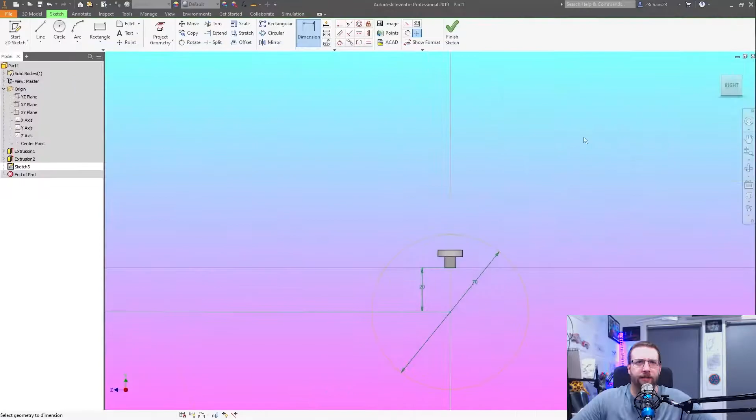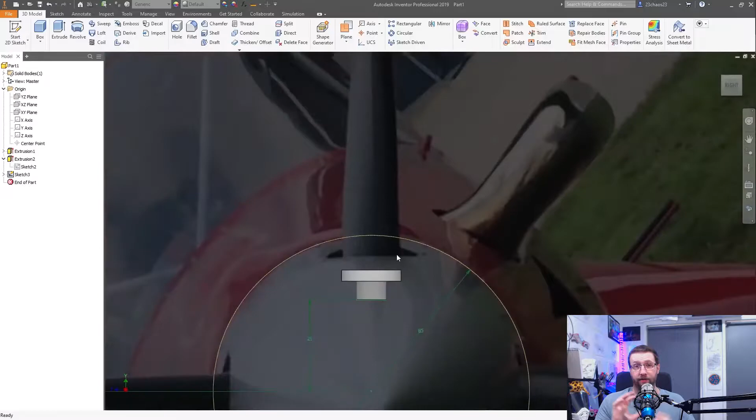First things first, get some reference, get it into the scene. Just get some scale, some points. In one of his videos during the build series for Draco, he mentioned that he's using a 104-inch prop, which is slightly larger than the 102-inch prop that comes standard with the Draco. So I know that I have the prop size, and I know how big I want to make the spinner hub, which is roughly 70, 80 millimeters-ish.

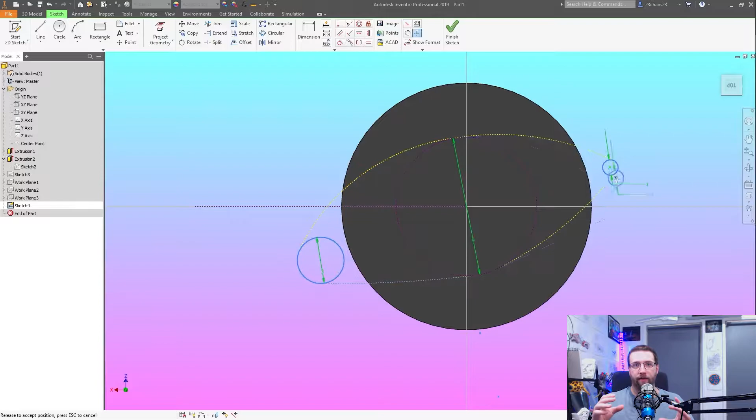It'll get better defined as we get further along in the project, when we can decide how the mechanisms and everything are going to work. But to start off with, just getting the reference in there, getting the length of the prop, and then looking at the prop from as many angles as I can to look at the shape and geometry of it. So here I'm just putting in the very first profile. It looks like a funny shape.

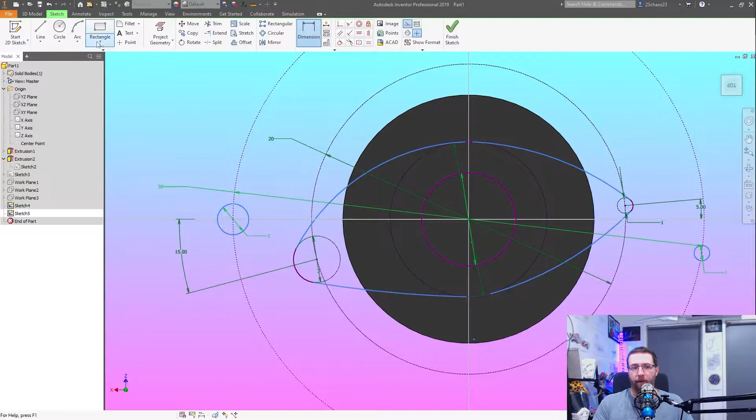Variable pitch props have slightly different aerofoils to regular props. Regular props are designed to have a certain pitch or a certain screw angle. This gives it a certain angle of attack when it is spinning around, and for every revolution, if we're moving through a perfect medium instead of air, for every bit that it cut through, it actually progressed that distance, based on its pitch, the spiral pattern that it creates. But a variable pitch prop needs to stay at a constant RPM to deliver different thrusts based on its angle of attack.

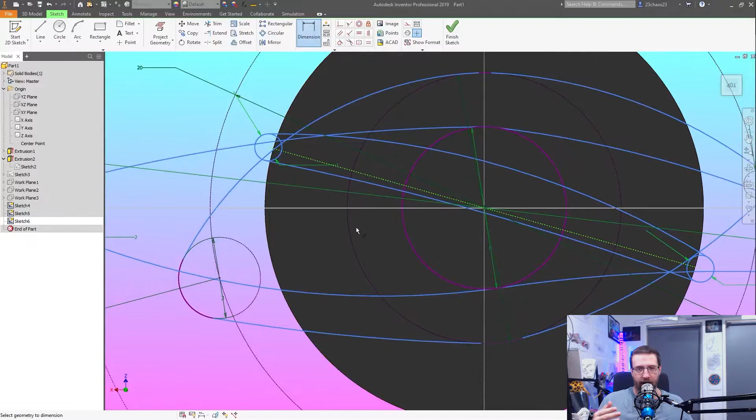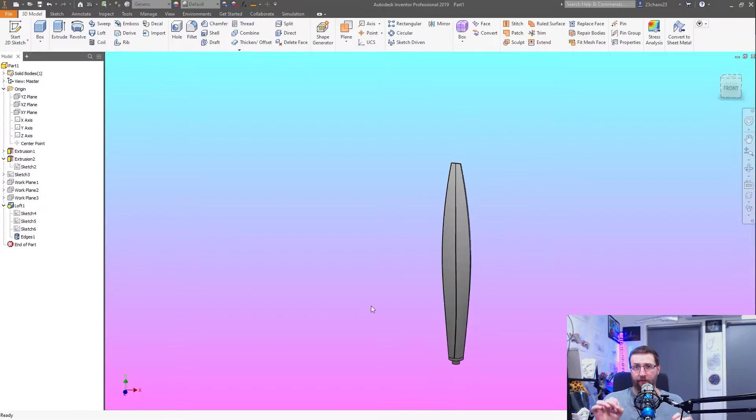So the shape of them is a little less aerofoily and a bit more flattish. It has a slight aerofoil curve to it, but for the most part it is just a flat blade that goes flappy when it's straight, when it's in beta mode, and it can turn and give you your reversed and forward thrust. So yeah, just going through creating basic profiles. This isn't the final form of it. You can see that center one is a bit weird. It's got a bit of an S shape to it.

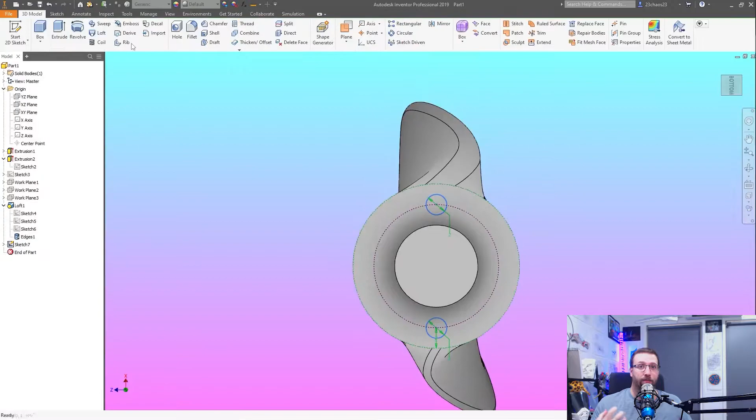I was just mocking this up quickly to get the basic shape as close as I can so that I could run some simulations. So after creating the shape, the right size, I'm looking here, okay, where can I put in cavities to put carbon fiber rods to give it some more strength? Because I'm pretty sure I'm gonna have to give it a little bit more strength, a bit more composite. But yeah, it might not need it. So there I got the weight of the blade. This was the key thing.

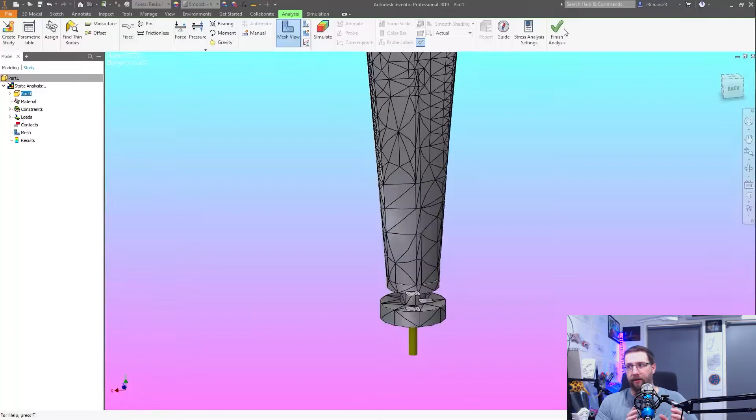So Inventor allows you to apply a materials property, and then you can look at the iProperties and it tells you the weight based on the volume and size of it. So that tells you how much it weighs. Then by going and doing a bit of Google searching, a couple of YouTube videos later, I find the mathematical formula for working out centrifugal force.

And from that, I can then make a spreadsheet, work out my RPMs, because I work out what RPM range I want. And from that, I now have how many newtons of force the blade will be under at a certain RPM. From that, I can transfer those newtons back into Inventor and run a sim test. And with the sim test, I can figure out if it's going to explode or not. Turns out it's not going to explode, and that's even without the carbon fiber reinforcing in it. So we're all good. So let's move on to the next thing, the tail section.

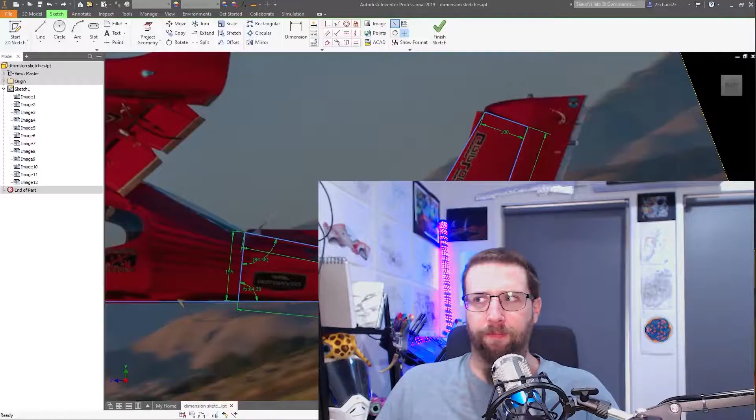This was interesting. This is one of the ones that I've done a couple of times now. This that I recorded is the first time I did it. Nothing really changed from the second iterations of this. The dimensions and the method I use for making the core structure, which is this cone shape, which is the tail itself, the spine. From this, I got dimensions of this. Okay, I've got a part file that I've got in the folder with all the parts for this.

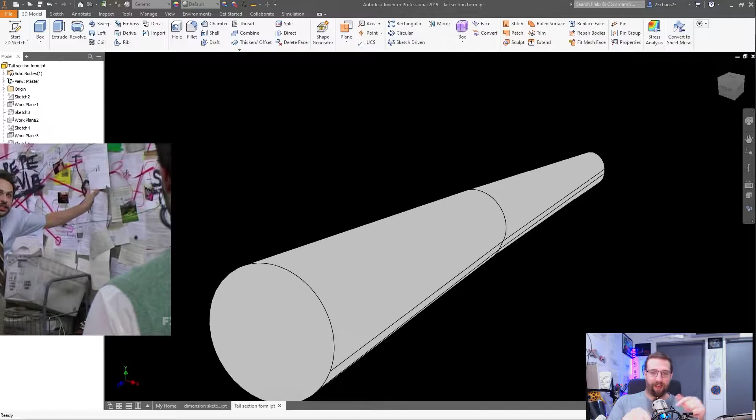And in this part file are just loads of pictures of the Draco stretched out to the right dimension for a certain individual thing and another thing that I can match the size of in another photo so that I can translate the dimensions from that image that I've stretched and scaled to the next one that I've stretched and scaled, so that I can get this one dimension on this one part that I can't get an accurate dimension of in the first photo because it's either not in the photo or the photo is at a certain angle that the perspective of it has changed and I can't get the dimension.

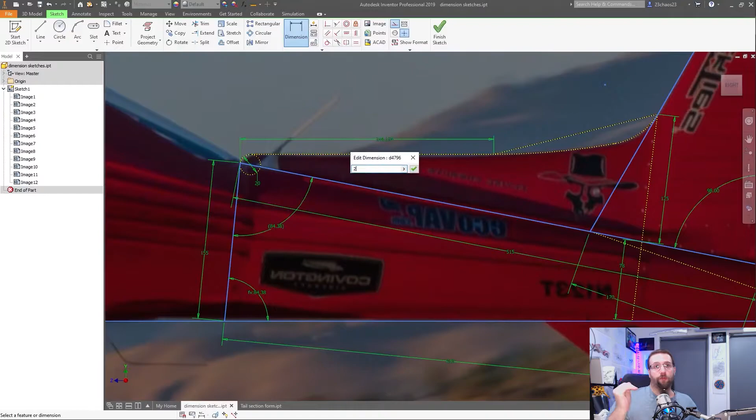So it's really crazy. It's like that meme of the board with all the strings, but in 3D, right? Okay, it's been a bit crazy, but I'm getting through it. So I made the cone that goes from the fuselage section down to the tip of the tail. And now I'm creating the spine, the ridge that goes on the top of it. And all that is a semicircle with a box at the front and another semicircle with a longer box that flares out at the bottom in the middle. And I stop it there.

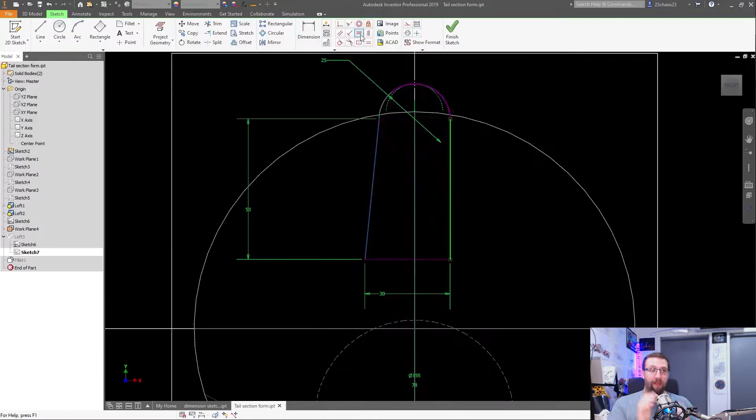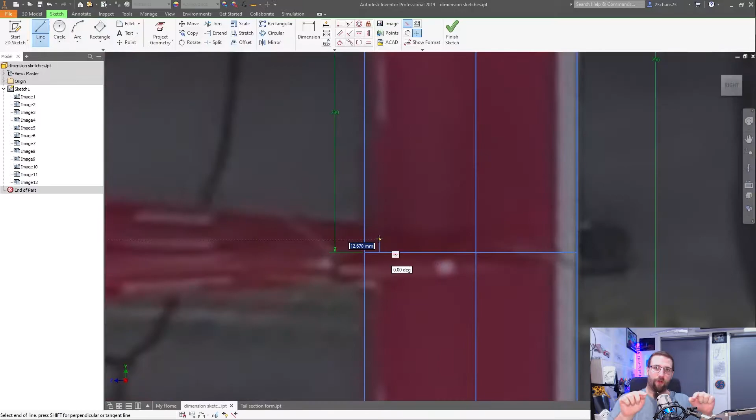So next up, I need to make another loft, which goes from the inside of the end of the cone out to the top of the vertical stabilizer. And this gives me the airfoil shape for the vertical stabilizer. But it sort of swoops from the vertical section through to that spine. And in order to do that, I have to make this slope that goes up, which is the vertical stabilizer. Then I have to create a sketch on the side of it, or in the center, and extrude and cut off the front of it. So I get a flat face at the front.

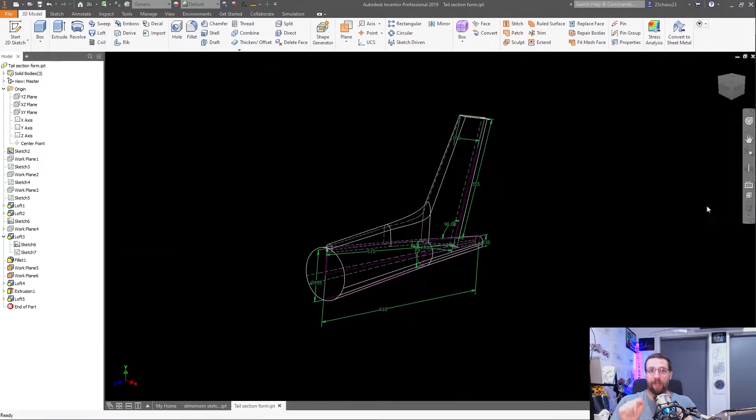From that flat face, I then loft between that face and the spine that I made before, which gives me the swoop. And that's how you create that shape. Doing stuff like this, where you're using lofting functions in multiple directions to get the shapes that you want, is basically what I've spent the last 3-4 days working on. That's it. So, what else have we got?

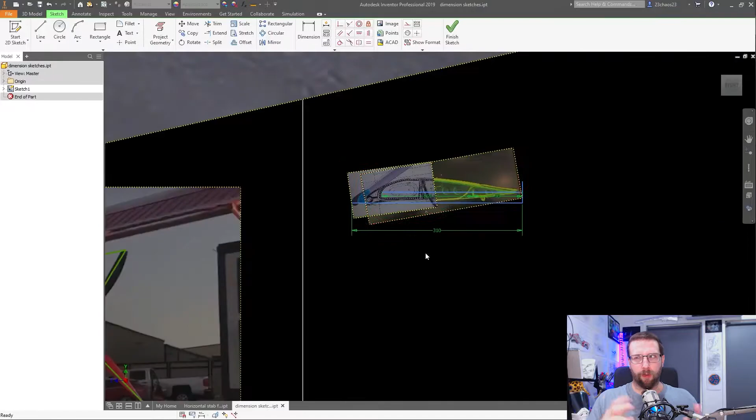We have the horizontal stabilizer. I only got footage of the horizontal stabilizer. I didn't get footage of me making the elevator, the flappy bit. Don't ask me why. I think I forgot. That's the excuse I'm going with.

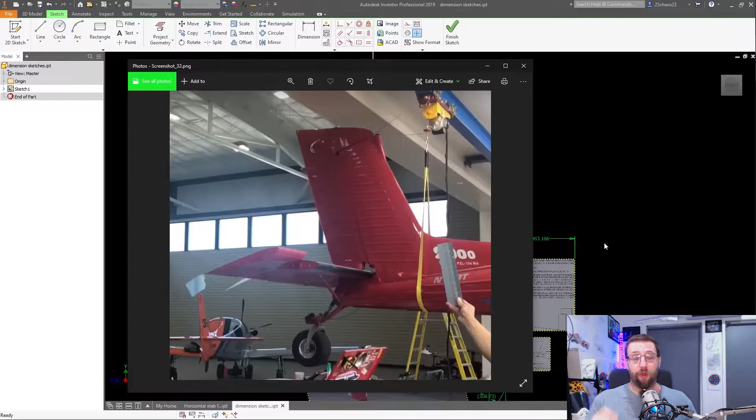So, once again, reference material. I'm going to keep saying this. Reference material. When you're doing a project like this and you want to be accurate to something, you have to go through so much reference material. It's not even funny. You're going to get sick of looking at the same pictures over and over and over, just hoping you'll spot one tiny detail you didn't notice before.

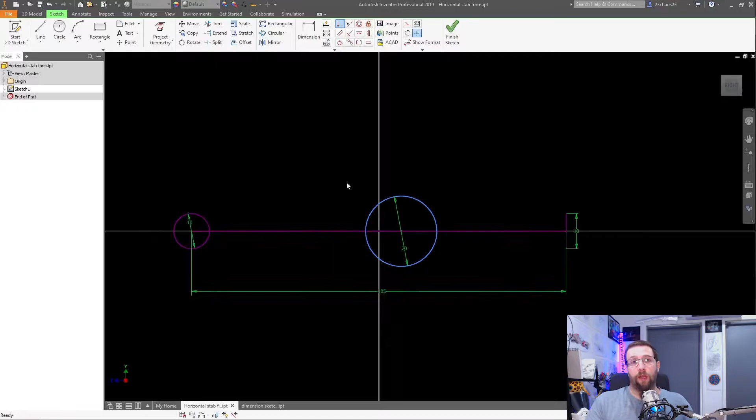And yeah, so there was lots that I learned about the rear section of the plane from these images. So first up, we're making the horizontal stabilizer. This is the bit that doesn't move, it stays still. I need to find out what the airfoil for it is, what the chord is. Just looking at a couple of different pictures, trying to get how skinny it is at the front, how fat it is in the middle, does it go straight, does it slope, what does it do? So we're gonna find out, get the profile, extrude it, real simple.

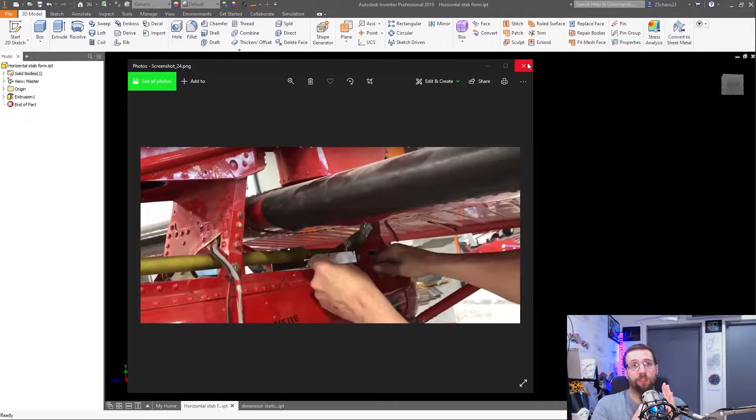Now we just look at how everything connects. It looks like there's a tab that comes out the front of it that goes into the back of the spine of the vertical stabilizer. There is a tab that comes out the back. That is for the elevator. It is a centralized hinge. It is a displaced centralized hinge. So the hinge is outside of the fixed body and in line with the fixed body. It's not an upper or lower hinge. So there's a tab in the middle and there's two tabs on the outside.

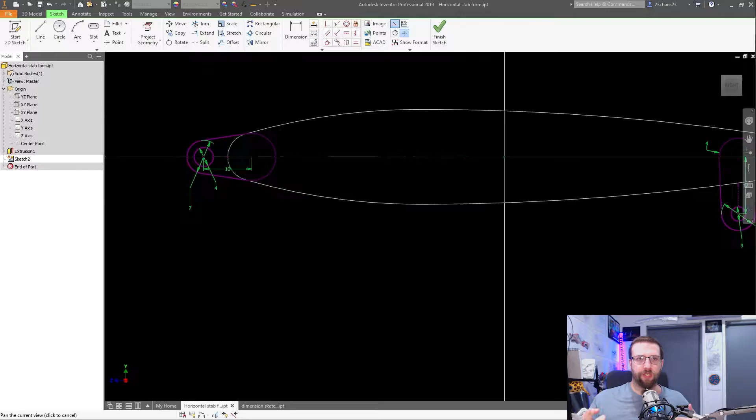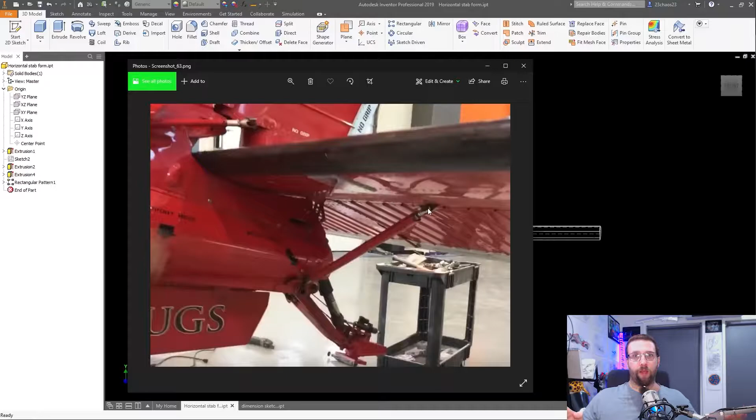Now it's a very interesting elevator because it has bits on the ends that are, I forget the name of it, it's the same thing as counterweights, but it's a counterfoil. So basically it's an airfoil that hangs forward of the pivot point so that when you are applying pressure, the airflow going over it balances out the forces against the airflow at the back of it. So you're not having to put as much force into your controls to get it to move. A bit of the airflow does the work for you as well. So it balances out. Yeah, I think it's called a counterfoil. It looks like a counterbalance, but it's for airfoils.

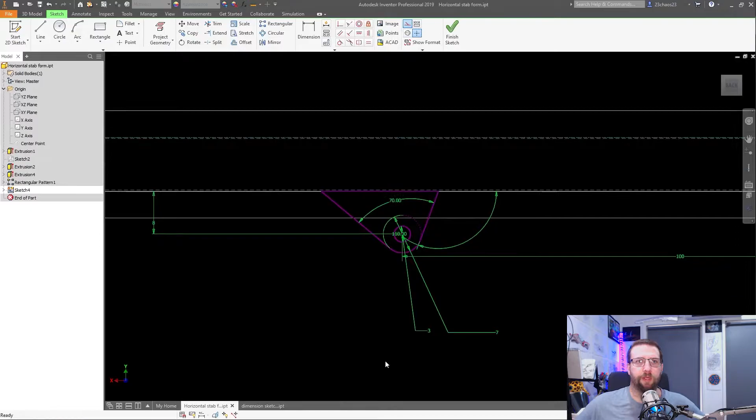Putting in the lower connection, so there's a tab that comes out the front that connects the stabilizer to the back of the vertical stabilizer, and then there's one at the bottom that connects it to the back end of the tail, so it sort of sits on there.

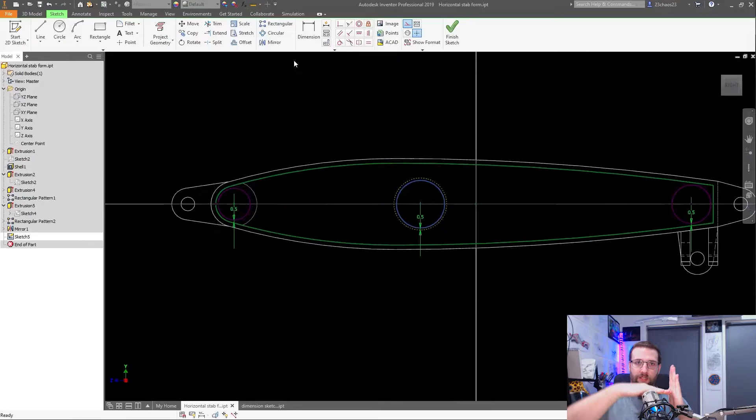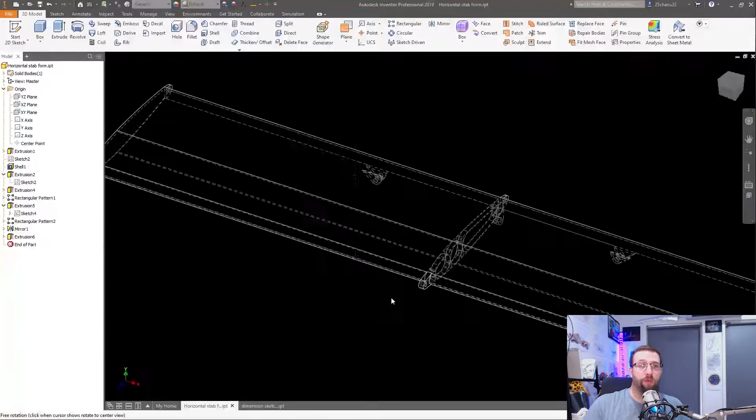Now I'm going to put a little mechanism in the back of the tail there that I can adjust, so I can change the angle of the horizontal stabilizer, its trim basically, to the rest of it, because once I've built this, depending on the weight and stuff, instead of having to move weight around or change the trim in the settings for the servos, I can just adjust the whole thing, and that will change just a few degrees. Makes the world of difference. I think that's going to be very important to have built into it as a mechanical function that you just set and forget and it stays the same until you change something else in the airplane.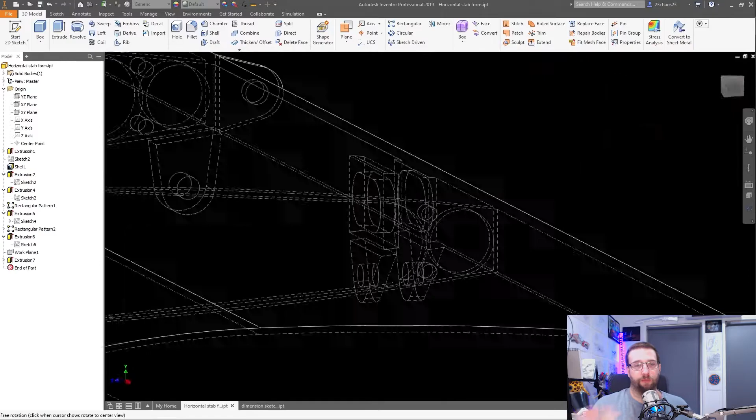Now I'm just adding the tabs on the outsides. These are cross braces, so they create triangular trusses between the center of the aircraft outward to stop it from going side to side like this. Only working on the one side of the aircraft because I can use a mirror function to do everything I do on one side on the other side, so I don't have to do stuff twice.

Being lazy is your friend. You work extra hard to be more lazy. That is the secret to doing this sort of stuff that I do. You be as lazy as possible, and you will learn all the tricks really fast. By really fast, I mean years and years of dedicated work, but we will just brush over that.

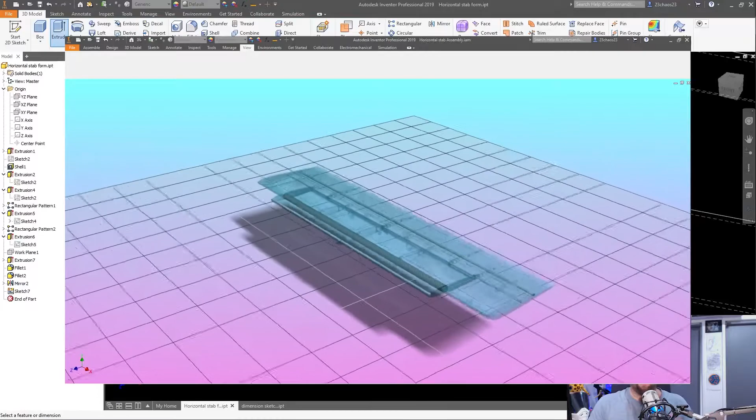Placed in the points there for some spars, so that we have a carbon fiber spar running through it, so we're not relying on the strength of the resin only. We also have some real strength carbon fiber. Yeah, carbon fiber is so strong. I love it. Yeah.

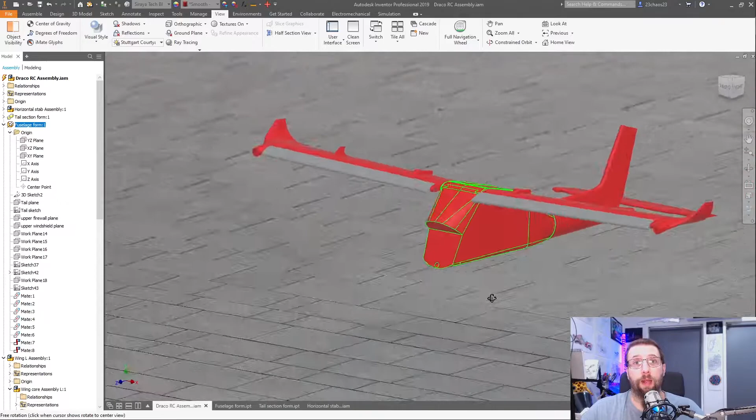So this is where we're at the moment. As you can see, there is a fuselage section there. I don't have any footage to show you of working on this. This was interesting, to say the least. Let's have a look at it.

So it's a bit transparent there. Let's just give it a materials override. Smooth, red. We'll just go default gray. Default gray. There we go. Right. There you can see it. It's a very interesting shape.

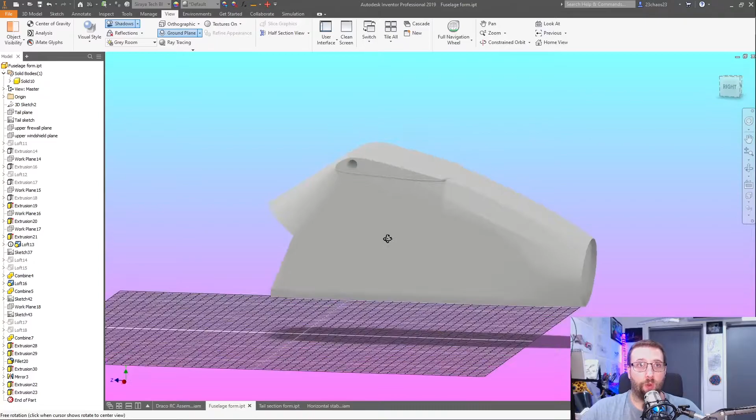So from what I've seen in the balsa plans, and all the other plans that I've seen online, or anything online that isn't the actual plane, no one has got this section of the plane right. No one has got this shape right. I have not got this shape right yet. I'm working on it. I'm very close. This is a very interesting shape. Let us have a look at how it is created.

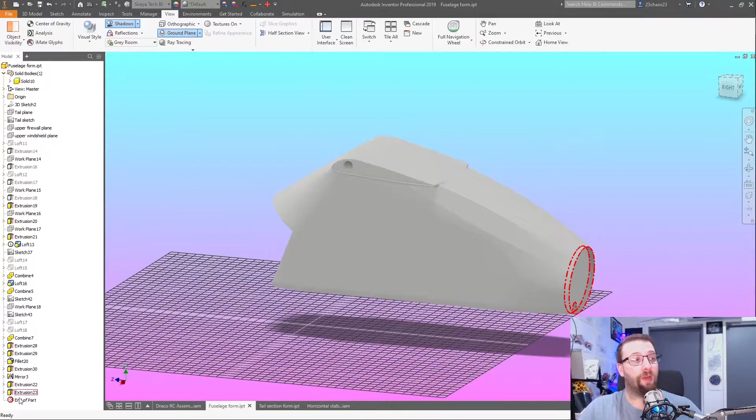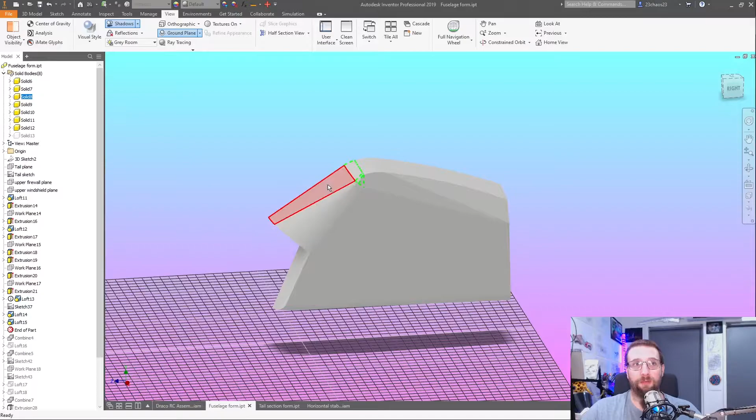So we come in here just before I started combining stuff. So this is before I put the airfoil section on for the root of the wing. This thing is made up of, and let's count them now. 1, which is the window section. 2, which is the head of the wing root. 3, which is the loft between the wing section and the head of the wing root.

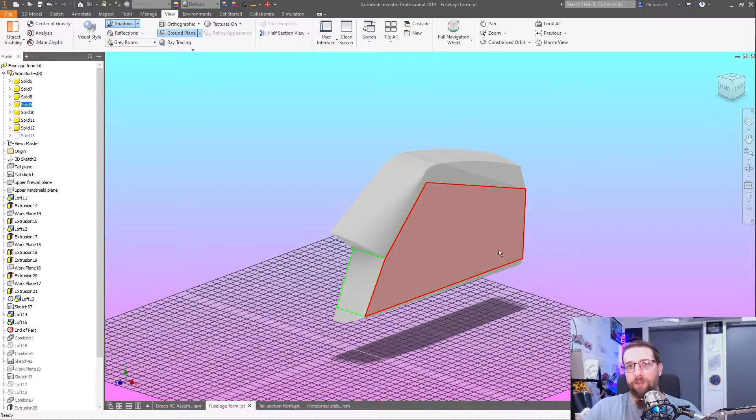4, this is the majority of the body. It has quite a large flat face on the side, but it is not a straight angle. It is at a 5-degree angle. So if we come in from the front, you can see it more clearly. It has a bit of a sweep to it, a straight line. Right? This whole section here is pretty much flat, so I just extruded this out and then used another extrude function to cut it at that angle, so it creates that angle.

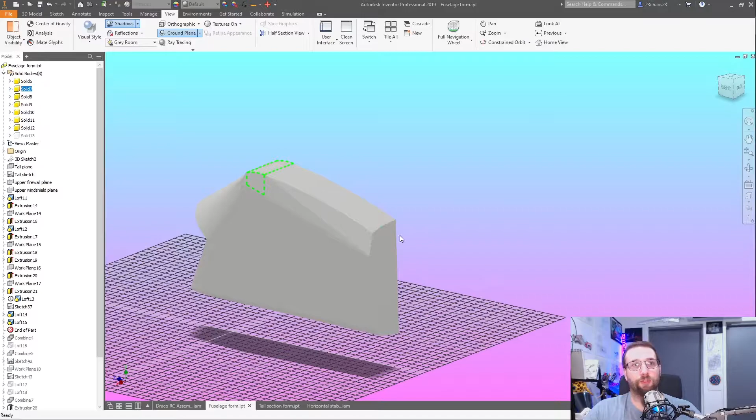Right? What are we up to? 1, 2, 3, 4, 5. 5 was an interesting shape. So what this is, this was a loft from the back of number 2 to the shape that I created off the back of number 4. Yeah. So on the back of here, I created a sketch plane and I created this shape, but it didn't include this line here. It came sort of straight up.

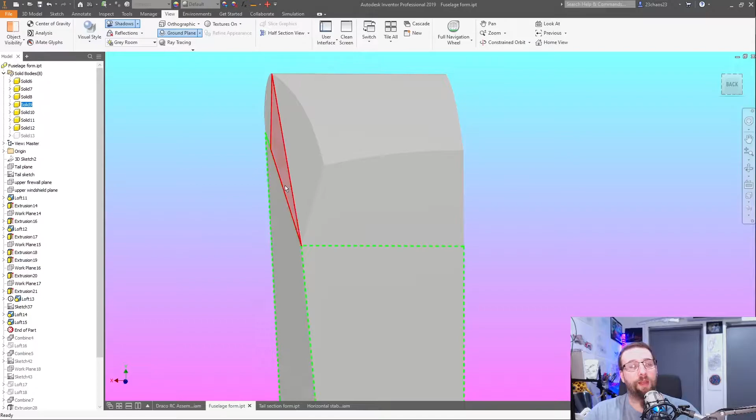So I created a loft from the back here to here, which gives me this curve here and this curve here. But the problem is it came out too far here, and it turns out that the side back edge of this plane has these two flat faces under the wing, and they're very difficult to see. You have to really look for them. Where is the image that I have?

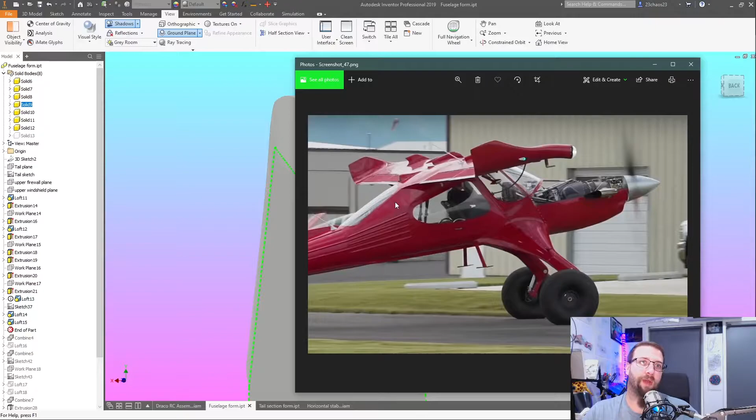So in this image, it's a little difficult to see, but you can clearly see that this is pretty much a flat face here. You can tell by this shadow. If this was a curved face, this shadow would have a different shape to it compared to the line that it's being projected from. Also, you can tell by the lighting, it's difficult to see, but a lot of the mottled lighting in that face is pretty flat.

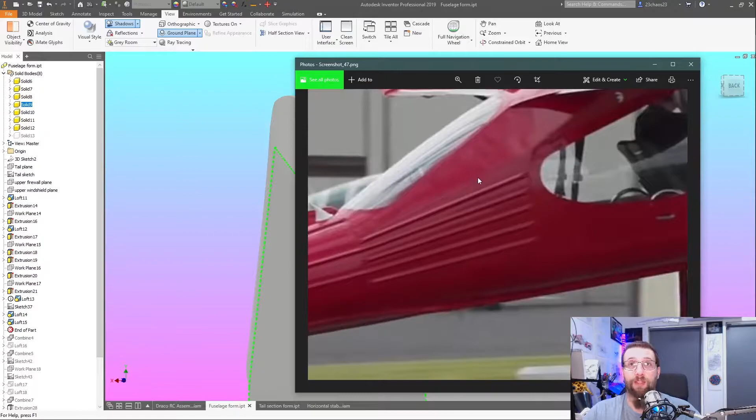If it were a curved surface, you'd see more of these lines. These lines are created from light refracting off of a curved surface. It's more of a flat mottled sort of shape, so that tells me that is a flat surface. I also know that this is a flat surface in here, and there seems to be a hard line there. Looking at another photo, this one here. This one's a little bit more blurry, but this one you can see it a lot more clearly.

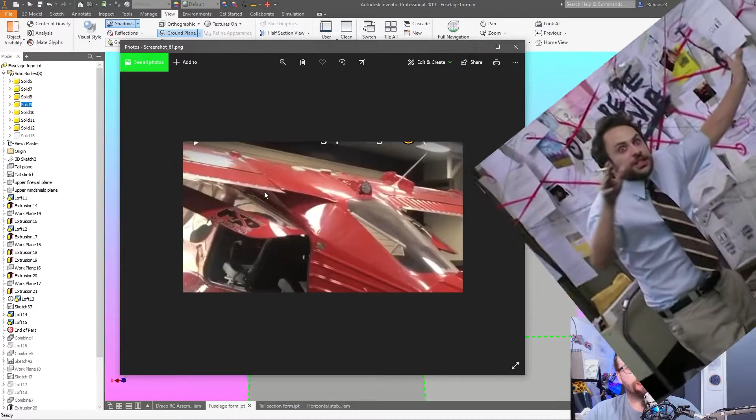There is a hard, distinct line here, going back, creating a triangle shape. We have another triangle shape in here, and another triangle shape that looks like from here. So this surface here is not the same as the flat surface here of the door. And this surface here is the dihedral angle of the wing, because if you continued this surface up, it would meet up with this point here on that line.

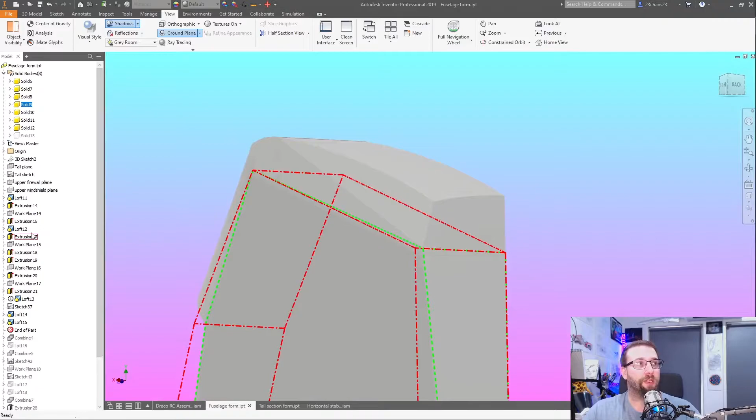So looking at these reference images, trying to get this curve here plus these flat faces was a nightmare. Coming in and having to create the curved surface first, and then creating multiple extrude functions. These ones here. So this one cut away the dihedral face, and then this one cut away that angular face there. And then to top it off, I then had to do another loft function that trimmed, because this was a straight line continuing from this curve that came out to about here where the mouse is.

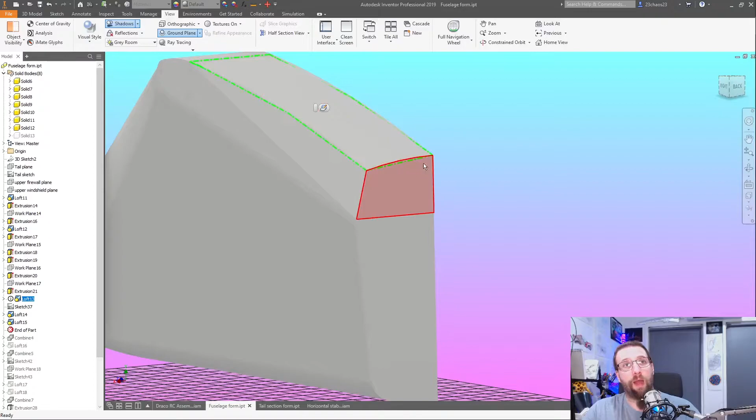I needed this to have a bit more of a curve in it. So if we look in this loft function, you can see the sketch that I had to create this compound curve on the roof of the aircraft here. It's such a strange shape. It's very complicated. It took me hours to figure this out, and I'm so happy with the results.

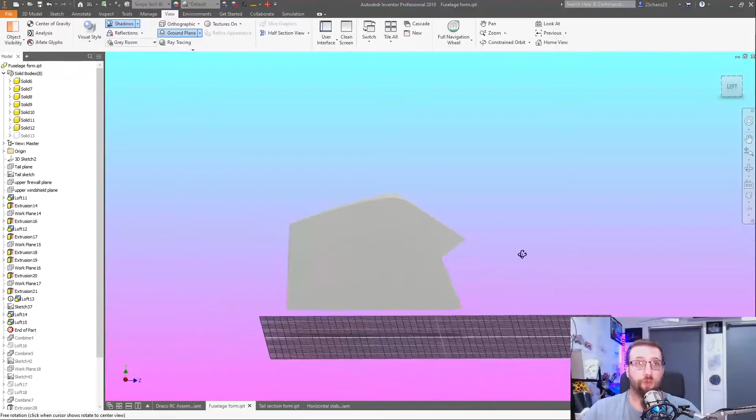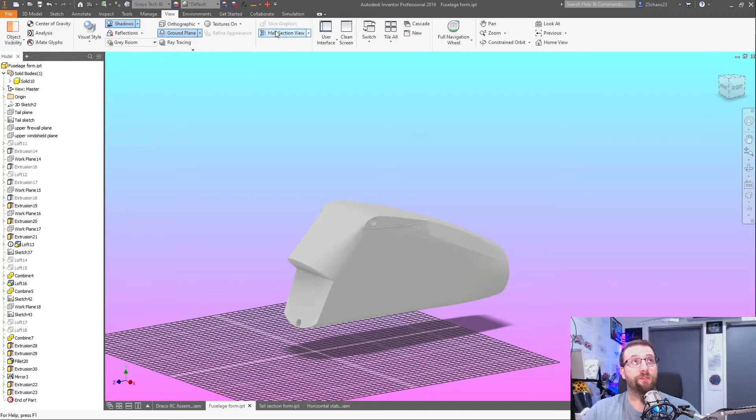This is the closest shape to the Wilga, to Mike Patey's Draco, that I've seen anywhere. Every balsa plan that I've got or found doesn't even come close to this. So this is much better. Things I'm not happy with that can still be better: for starters, I'm unable to shell this shape. If I grab this shape and go to 3D model, I can't use this shell tool to make it hollow so that I can remove all the weight and do all the other bits inside that I need to do. I'm going to have to do that manually.

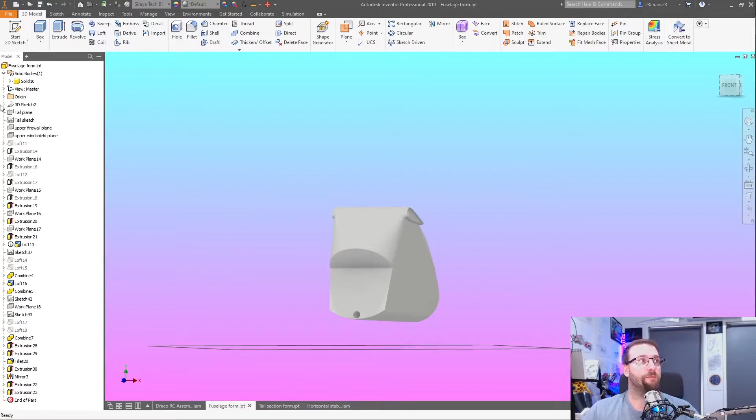The other things I need to change, this isn't a perfect, well, it is here, but it's not supposed to be. This is supposed to be a little bit shallower in this axis, so I need to make that shape. But the way that I've made this thing, and this is going to blow your mind, this is the sketch that I used to create all of these wacky shapes. This is a 3-dimensional sketch that gives me all the dimensions and shapes that I need to work stuff out.

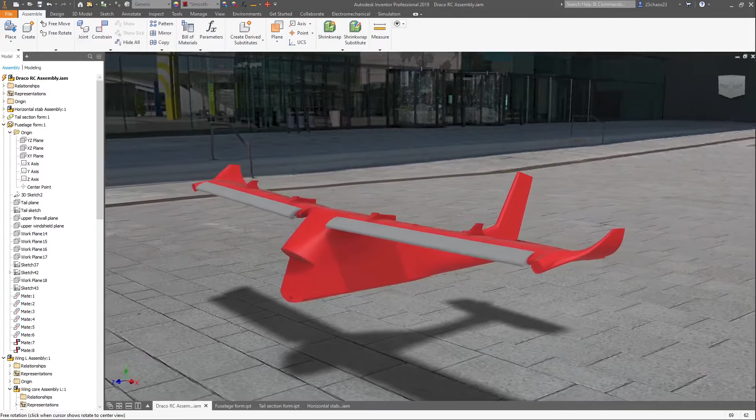So there's still lots to do. I still want to do the front cowling, the bit that comes off the front of the aircraft, so that we have now the overall dimension and shape, and I still need to do the rudder. And once I've got that, all the major parts are done. Then it's just coming in and doing all the detail work, getting all the surfaces detailed with rivets and stuff, and doing all the interior stuff. How does it all fit together? Where do the components go? The receivers, the servos, the motor, everything.

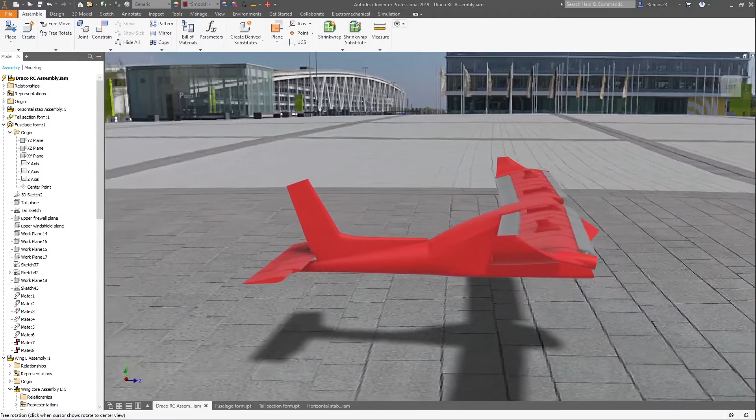I've still got to do the landing gear. Oh my god, that is going to be the hardest part. I'm leaving the landing gear, the main gear, till last. That is going to be so hard to do. So there we have it. Bit of an update for you guys, show you what I've been able to get up to.